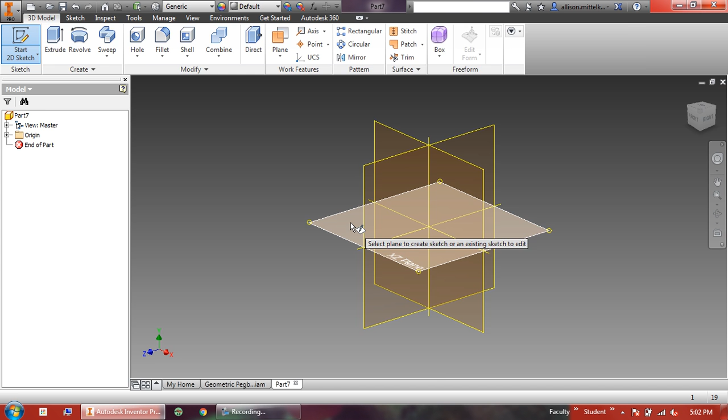The first thing I'm going to do is select New Part. I'm going to click the picture above, Start 2D Sketch. I'm going to choose the XZ plane, the flat one. I'm going to use the rectangle tool because the first thing I have to do is draw the bottom, the base. So I'm going to click here and here.

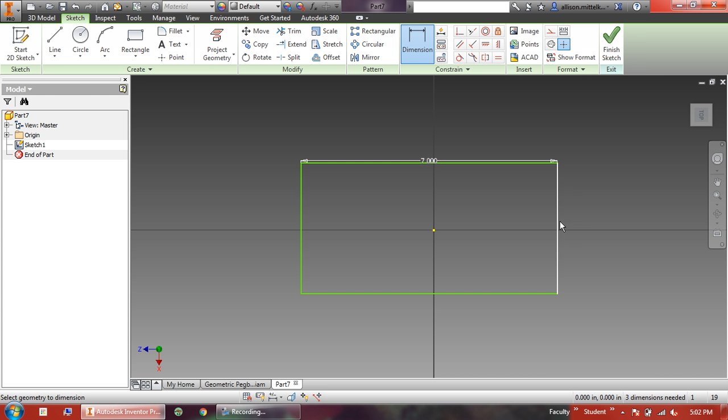Then I'm going to click Dimension, and it's a 7 by 7 square. So I'm going to click Dimension for the width and type in 7. I'm going to click on the word top so it recenters it all in there. I'm going to click on my height and change that to 7.

Then I'm going to hit Finish Sketch, and I'm going to extrude it to 0.675 and hit OK. Then I'm going to click Start New Sketch because the first thing I have to do is put in the circle holes for the circle pegs.

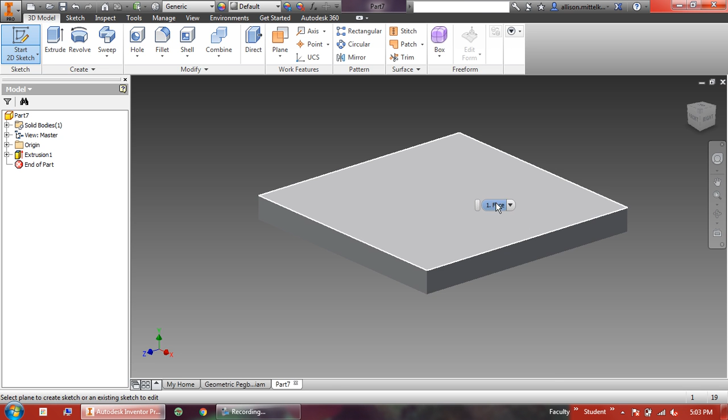So I'm going to click Start 2D Sketch, and then click on the top of my base. The first thing I like to do is hit Project Geometry and click on the top of my base to bring those yellow lines out so that I can see where I'm drawing to. Then I'm going to use the circle tool and draw 4 circles off towards the left. It doesn't matter the size as long as you have 4 of them.

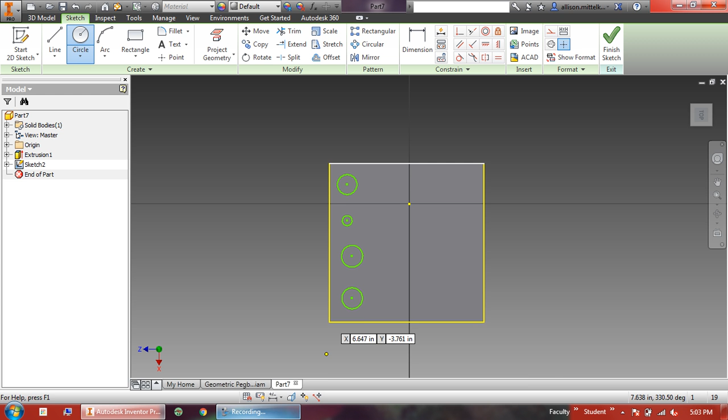Then we're going to dimension those circles. The first thing we want to dimension is the diameter. So I'm going to click on a circle, change it to 0.875, and do that for all the circles.

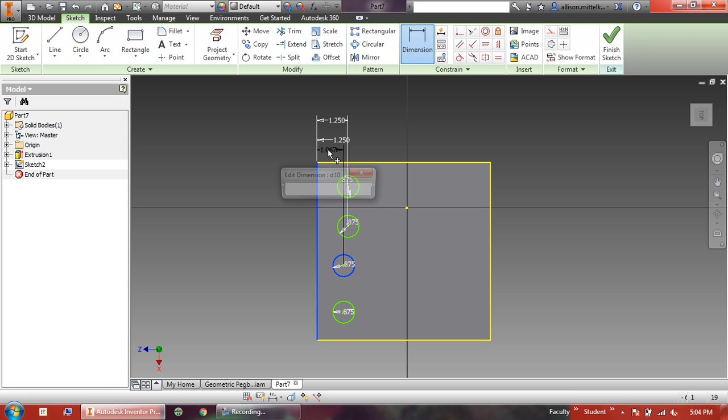Then I have to dimension from each circle to the left-hand side of my base. So I'm going to click there, and that's going to be 1.25. I have to do that all the way down, and this is really what lines them up. I like to put them all at the top so that I can see a nice straight white line there. It just keeps it a little cleaner.

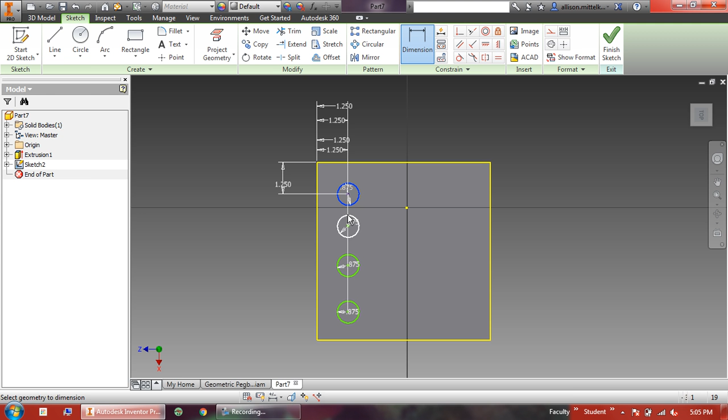The next thing to do is to dimension from the top circle to the top of my base, and that's 1.25. Then I go from each circle to the circle right below it, and that's 1.5. So from that circle to that circle, and then this circle to this circle, 1.5. And this circle to this circle is also 1.5.

On your paperwork, you're going to see a measurement here of 1.25. You do not have to put that measurement in. If I put that measurement in, it actually yells at me, and I can either hit cancel or accept. If you really want to be able to see that number, you can hit accept, but it doesn't matter, because you can't actually change this value. So if this value is wrong, that means one of the other values up above is wrong, and you need to check those numbers to make sure they're all correct.

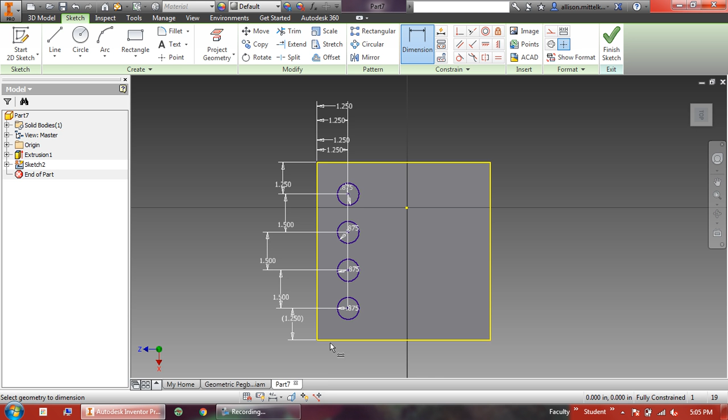I know I'm ready to move on because all of my circles are blue, so I hit Finish Sketch. Then I'm going to hit Extrude and click all of those circles, making sure I hit the circles and not the top of the base.

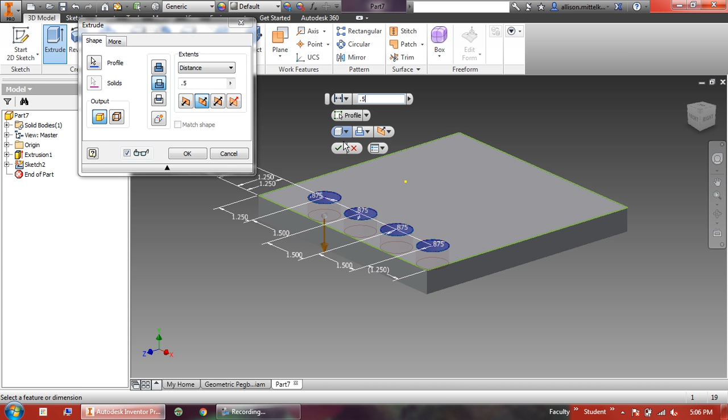Then I'm going to come to this little blue printer guy and choose Cut. If you look at your paper, it tells you to cut 0.5. You don't want to cut all the way through, just half an inch. Then I can hit OK, and I have my circle holes.

Next, I need to draw my rectangle holes, so I'm going to hit Start 2D Sketch and click on the top of my base again. I like to turn it so that everything's lined up like it is in the pictures. Then the next thing I do is hit Project Geometry and click the top of my base so that I can see where my circles already are, and the edges of my base.

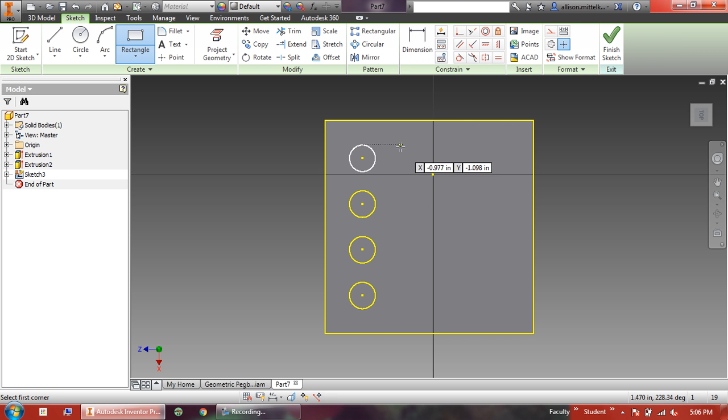Then I'm going to draw rectangles, and they go long ways. So I'm going to draw them long ways. It doesn't matter how big, because you're going to dimension them later anyways.

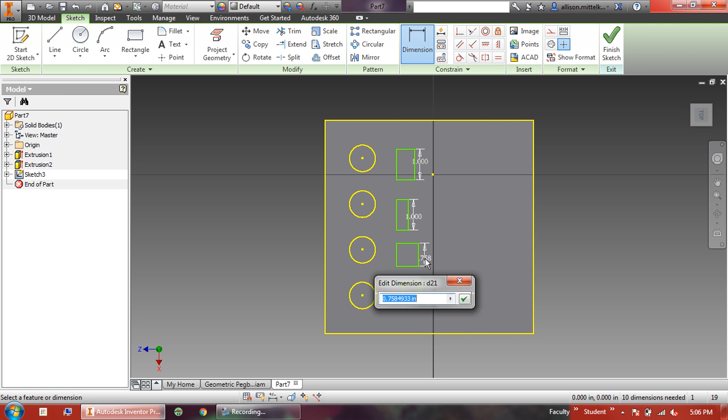So then we hit Dimension, and the heights of all of them are going to be 1, so I'm going to start with that, because that's an easy number to type. That's just why I do it. So all of these are 1, and then the width is 0.625, so I'm going to click that and type in 0.625, 0.625, 0.625. It's important to make sure you get all the numbers right, because otherwise you're going to have a hard time when it's time to assemble these things together with the pegs.

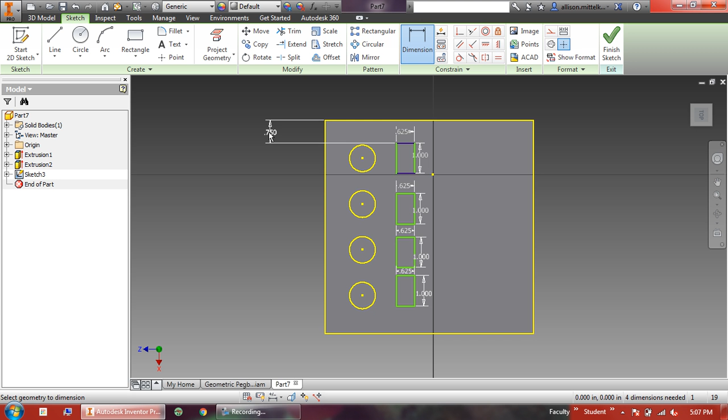So now I need to dimension the rectangles with the rest of the board. I'm going to click on the top of my top rectangle and then the top of my board, and make that 0.75. Then I'm going to go from the bottom of the top rectangle to the top of the second rectangle, and that's going to be 0.5.

So we're just changing the distance between each of these. Alright, and that's 0.5 all the way down, the distance between the rectangles. And then just like the circles, if you really feel the need to want to see this number, make sure that it matches the top number up here. Alright, you can do that, but it will yell at you when you do that.

You can either hit cancel or accept. And so then you'll notice I'm not all blue yet, so I know I'm not done, because I still have to go from the left side of the rectangle to the left side of the base, and that needs to be 2.5. Now mine, they were already lined up. If you notice, they all turned blue. They line themselves up. Actually, I think I lined them up when I drew them. So if yours turn all blue, then you know you're good. If two of them turn blue, then you know that those two are good.

Sorry, I really meant to silence my email.

So if you still have some green here, you still have to do this. You have to go from one side, the left side of your rectangle to the left side of your base and make it 2.5. Alright, I don't have to because mine automatically line themselves up.

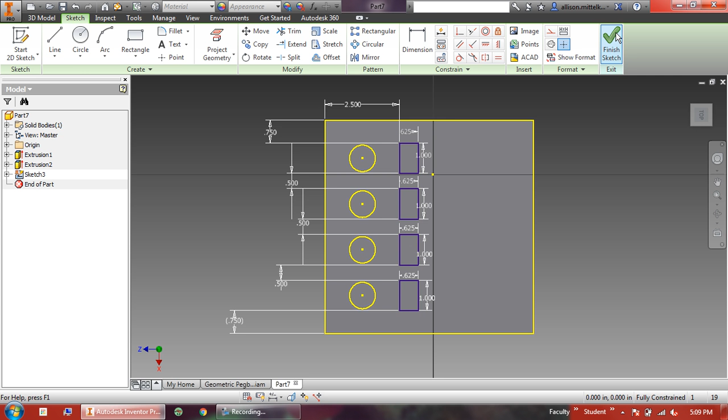So then, once they're all blue, I hit Finish Sketch, I hit Extrude, and I click all four of these rectangles, making sure to hit the rectangle. You want that part to turn white, not the rest of it. Alright, so I'm going to click those rectangles, click the blue printer to cut. My number is already 0.5, so I hit the green check mark. And now I'm done with the rectangle holes.

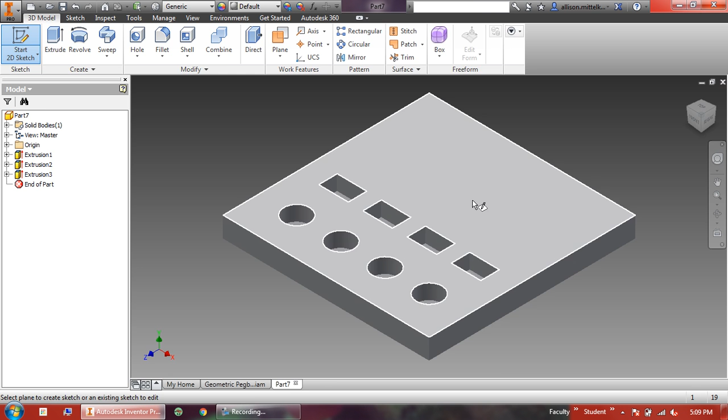So now it's time to move on to the triangle holes. Now I'm going to hit Start 2D Sketch. I'm going to click on the top of my base, and again it twisted the wrong way. So I'm going to turn it so that my circles are over here and my squares, so then I can draw my triangles right there. But in order to see that and know where I should be putting the triangles so that they're close, I'm going to hit Project Geometry and click the top of my base just to show me those lines.

Then I'm going to use the polygon tool. You can use the line tool, but there's a couple of extra steps in there, and it's just so much easier to use the polygon tool. Polygon tool makes it equilateral, so that all sides are equal, which is what you need anyways.

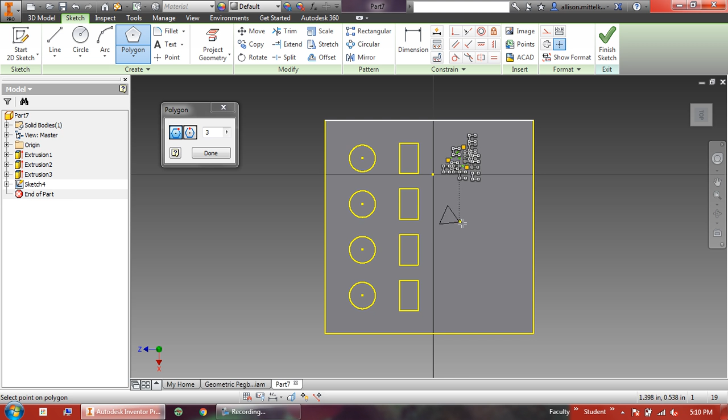So I'm going to hit the word rectangle here. I'm going to come down to the very bottom where there's the polygon tool and click on that. The little box is going to come up and say, how many sides do you want your polygon? Since we're drawing a triangle, how many sides does a triangle have? I hope you said 3, because that's how many. So I'm going to type in a 3, but I'm not going to click done until I'm done drawing my triangles. So I'm going to come over here, I'm going to click once, twice, 3 times, 4 times, and then I can either hit escape or done, and I've drawn my triangles, but they look really bad because they're all off-centered.

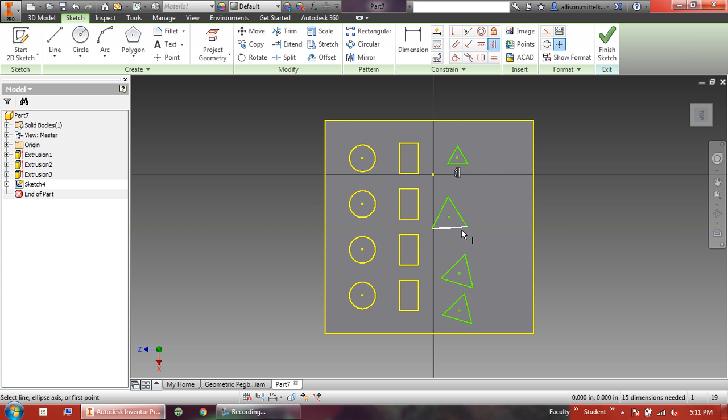Now, if I see the word top right here and it's readable, I use this button. But because my word top is sideways, I'm actually going to use this button, and it's going to make the bottom line of my triangle go straight. So I'm going to click on that, and I'm going to click the bottom of my triangle, and it straightens it. Click the bottom, click the bottom, click the bottom. You want your triangles straight so that they line up when you get your final product done.

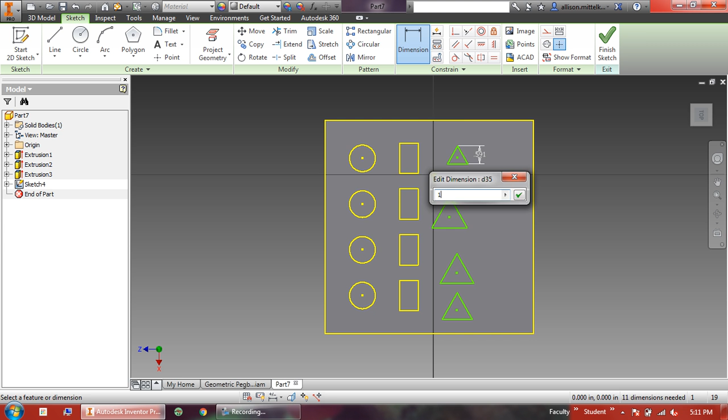Alright, then I'm going to hit Dimension, and I'm going to go from the top of the triangle to the line opposite it at the bottom, the one we made straight, and I'm going to make that distance 1. I'm going to do that for all these triangles so that they're all the same size.

Alright, then I'm going to go from the top of each triangle to the left side. So I'm going to go from there to there, and it's going to be 4.375. I'm going to do the same thing with this triangle from the top point over to the side.

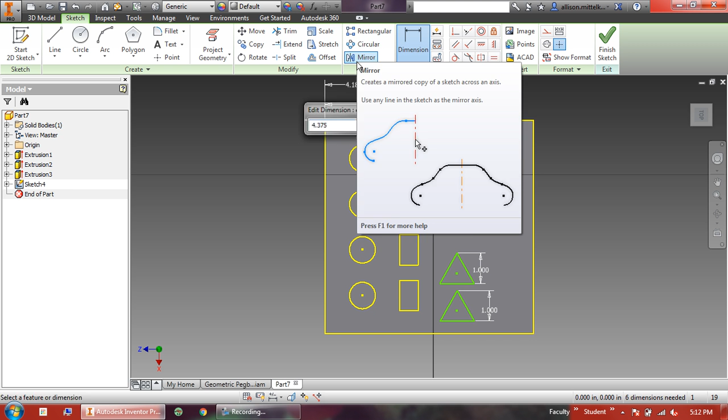Making sure that when I click the top point, it's turning white. I don't want the whole line, just the top point. This is lining them all up with each other. You know you're doing it right if they're lining up with each other.

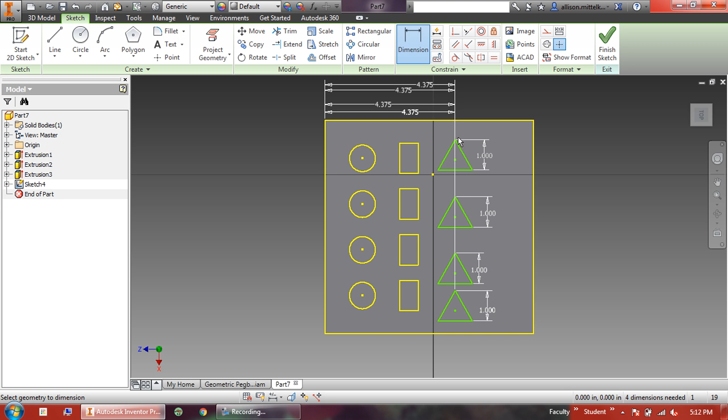Then I go from the top point of the top triangle to the top of the base, and that needs to be 0.75. Then from the top of one triangle to the bottom of the one above it, that's going to be 0.5. Notice they're turning blue as I do this because they're getting put in place so they can't move.

I've done that to all of them, going from the top point of one to the bottom of the triangle above it to make it 0.5. If you want, go from the bottom line of your base to the bottom of your bottom triangle and make sure it's the right measurement to match the one at the top. You can do that, but it will yell at you, and you can hit cancel or accept. It's up to you.

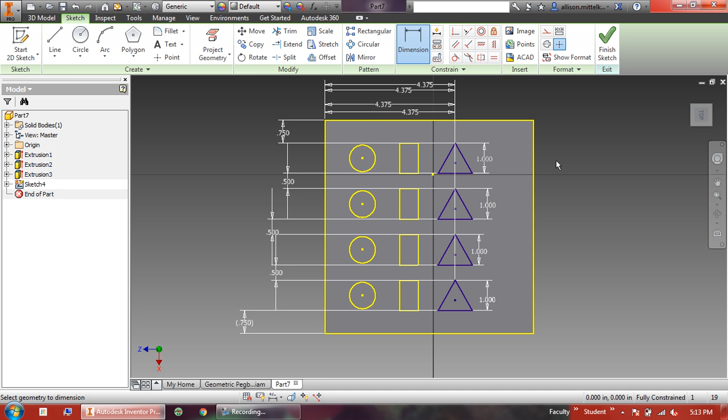Now they're all blue and look lined up, in about the right place, so I know I'm doing it correctly. I hit finish sketch, then extrude, click all 4 triangles, choose the cut button. It's already at 0.5, so I hit OK, and I've got my triangles.

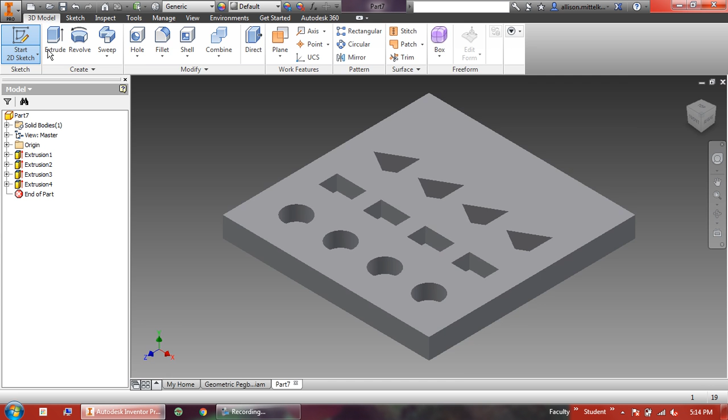Now on to the squares. I'm going to click Start 2D Sketch, click on the top of my base. Try that again, it decided to go the wrong direction. I'm going to hit Project Geometry and click on the top here.

I'm going to use the rectangle tool. To get back to it, I hit the word polygon and go to rectangle 2 point. I'm going to draw some rectangles. It doesn't matter the dimensions, because you're going to tell it how big to be later.

Then I hit dimension and make the sides of each of these 0.75. I did the width and the height of both of them because they're both the same. Width and height, width and height, width and height. Now they're all square, so that's good.

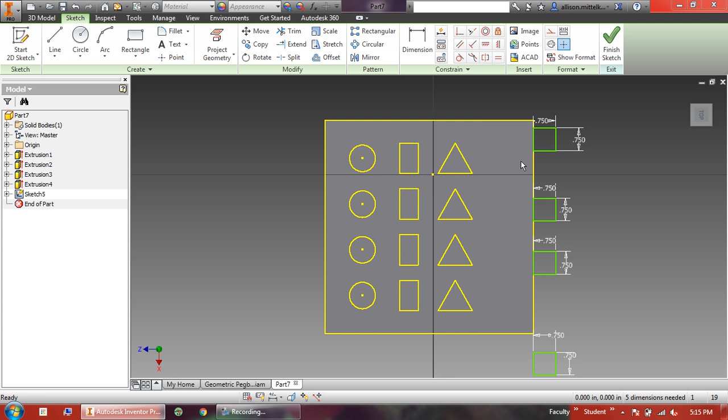Now I need to dimension. Actually, what I'm going to do next is click on one of these heights and drag them over so they're back on my base. It helps make things easier if you click and drag them. Mine move together now. They've lined themselves up on the left-hand side, even though I didn't do that. It should make my life easier later.

Now I hit dimension. I click the right side of my square, and then the right side of my base. And then it's 0.625 - I don't know, you have to check that number, I'm not sure about it.

Then I go from the top of my top square to the top of my base. It's 0.875 - again, check the number because I'm not sure I'm right. Then the distance between each square is 0.5. That's probably not right, 0.75, I'm sorry.

I can tell because they look like they kind of line up with the others, and that's what really helps me know if my numbers are correct. Because they look like they line up, I'm probably right, but I'm not confident, so you need to double check your numbers in your packet for all of these. I don't have the packet with me, so I can't guarantee the numbers I'm using are the actual correct ones.

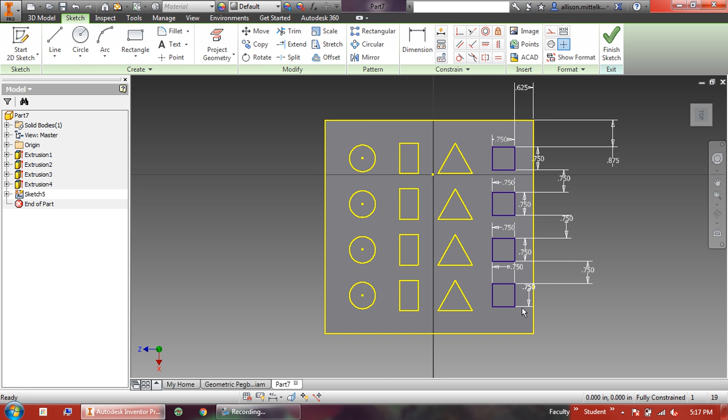Now I know I'm done because all 4 of my squares are turned blue. That doesn't mean I'm correct, but it does mean they won't move anymore. It'll yell at me if I try to dimension it anymore. So if they look like they're lined up, I don't have to change any numbers, so I can hit finish sketch, then extrude and click on all 4 squares.

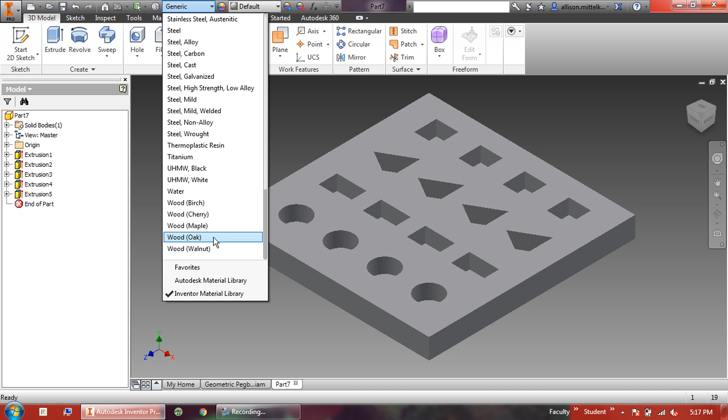Choose the cut option. Now all I have to do is change the material. I think I said in the packet some kind of wood - I'm not sure what I said, but these are all different types of wood. I think I may have said oak, and so there's the oak, makes it look like wood.

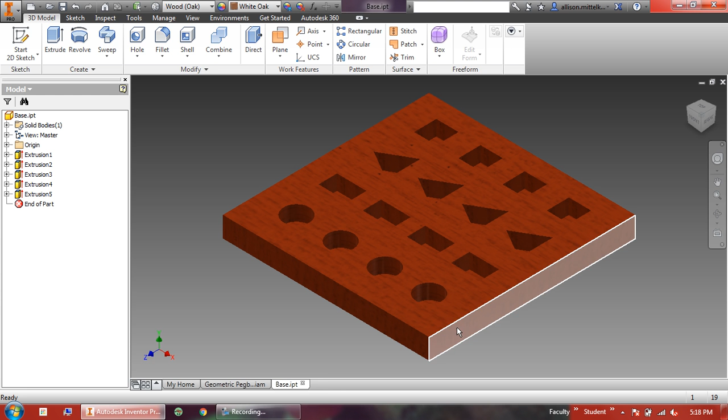I go up to the I, click save, make sure I'm in my flash drive, and change the file name down here. I call it what it is, so it's the base, so I call it base. Then I hit save. That's it, your base is done. Once you and your partner are both done with the pegs, you're ready to move on to the final assembly.